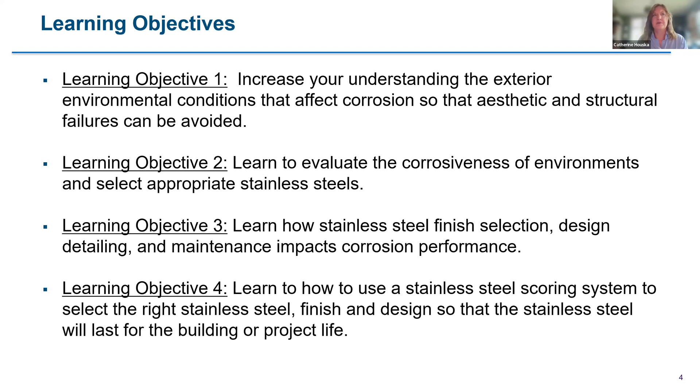I'm going to introduce you to a scoring system that I developed for the International Molybdenum Association, with input from other corrosion specialists around the world. It's geared toward aesthetic applications where any staining is a potential failure, but I will also comment on situations that could cause structural failure.

So I'm going to talk about resources as I go through, and Carly will be sharing links so you can find some of these as well. If you go to the IMOA website, there is a selection system, and in addition to the introduction page I'm showing, there are case studies, specific pages on avoiding galvanic corrosion, coastal salt versus de-icing salt, and other things that should be considered.

For example, if you're doing a green roof or green walls and using stainless steel, you want to make sure that stainless steel is appropriate for a soil environment, because fertilizers, even organic fertilizers, are corrosive.

So I'm going to talk a bit about some of the other resources on subsequent pages, including guidelines for corrosion prevention. But I wanted to let you know that on our website - both IMOA's website, but it was developed by both organizations - there is a library you can download with over 500 publications.

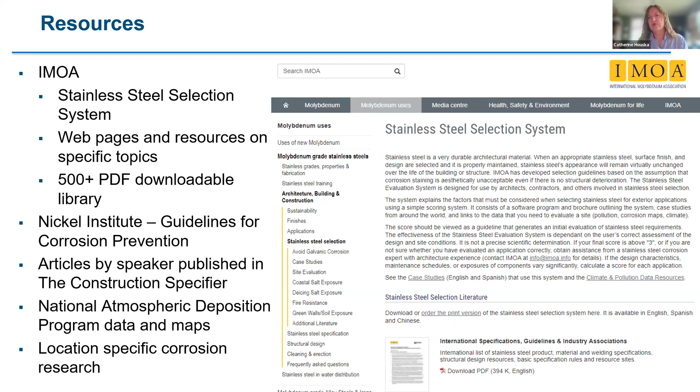And of course, there's site corrosion-specific research, which a metallurgist who focuses on atmospheric corrosion would probably have access to. Today's presentation will primarily be focused on information that is in these two brochures and on IMOA's website.

The scoring system for which stainless steel should be specified is a few pages long, and it provides some brief guidance on things to consider. Guidelines for corrosion prevention is a Nickel Institute brochure that I wrote probably 15 or 20 years ago, updated a few years ago with more information. It's a much more detailed brochure with a lot more examples to help you avoid some of these problems, and it has other fundamental design advice.

So where do we start? All materials will deteriorate if they are exposed to something that causes corrosion or deterioration. Pollution is certainly a factor, and exposure to it varies dramatically depending on the part of the world you're in. That image is one I took in Beijing on a particularly smoggy day.

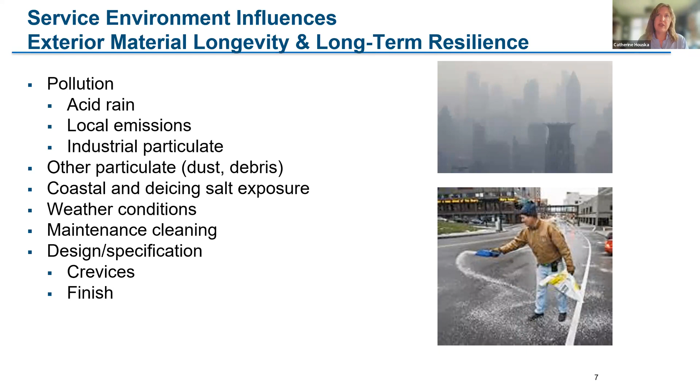Weather conditions play a big role, and their role varies with the specific material. I'm going to focus on stainless steel, but it's important to assess your site and what is expected, both in terms of weather and whether maintenance cleaning will be done, how frequently, and what will actually be cleaned or not. Design makes a big difference. If you've left crevices that are not sealed, or you pick a very rough finish, that will change the equation.

The U.S. government has occasionally done studies looking at the annual cost of metallic corrosion if the wrong metal is selected. The construction number is substantial: $50 billion a year for direct cost, and another $63 billion a year for indirect cost, not including infrastructure or industrial buildings. So for architects, or perhaps facade engineers, anyone working on buildings, that's the annual cost of selecting the wrong metal for a building.

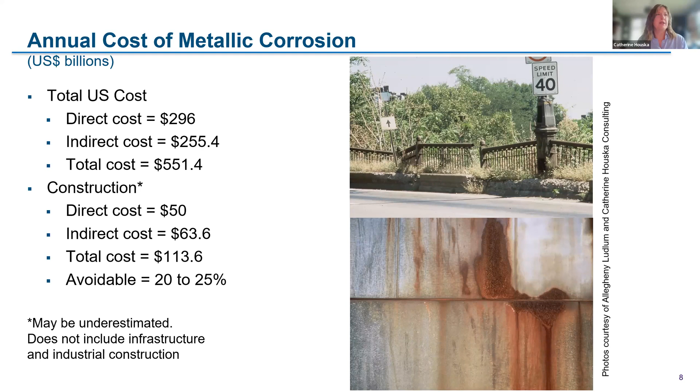These piers in Progreso, Mexico are a wonderful example of the importance of selecting the right material for durability. The functional pier was completed in 1941. It's still in use, the longest pier in the world, and was the first large application for stainless steel rebar. It's been thoroughly studied for those who have an interest, and it's just fine. The non-functional pier was built 30 years after the stainless steel reinforced pier, and it became non-functional within that 30-year period. That was carbon steel black bar.

Now, yes, you could potentially coat it, but there are a lot of states and provinces in North America that have banned coated rebar.

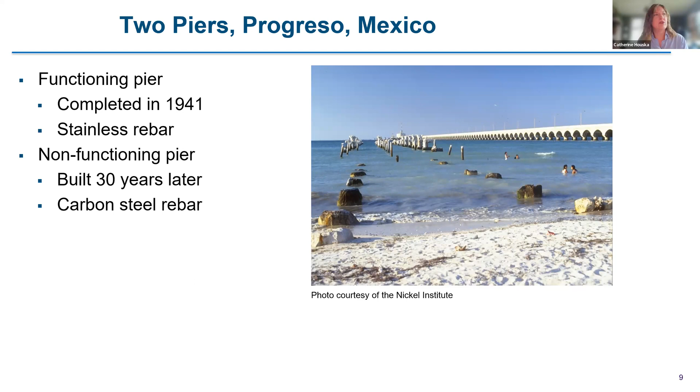So what's the difference between stainless steel and carbon steel? How does it work? Well, stainless steels are iron-based. They contain at least 10.5% chromium and are low carbon. Carbon steels have more carbon and less chromium, and are also iron-based. Note the name is stainless, not stain-free, unless you select an alloy that really will remain stain-free in your environment without maintenance. It's really a matter of what is likely to happen and what is needed.

The family of stainless steels, and then alloy selection within it, are critical. Corrosion resistance in stainless steel is obtained through chromium, molybdenum, and nitrogen additions. Nickel primarily helps with formability and weldability, though there are specific applications where it also helps with corrosion resistance. But the main advantage in the types of applications most of our listeners will be working on is that formability and weldability.

When stainless steel is clean and exposed to oxygen, it will form a thin passive film, similar to the passive film you might be familiar with on aluminum. As long as that stainless steel is corrosion resistant enough for the service environment, it will remain free of corrosion. But it is very important to select the alloy.

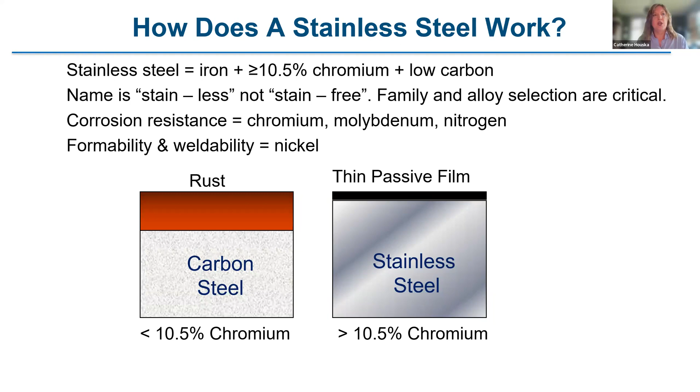In comparison, carbon steel forms rust on the surface, a thick uniform layer. When stainless steel starts to corrode, we get little pits on the surface. I've cleaned the sample to clean away the staining that was on the surface so you could see what that looks like. In comparison, carbon steel has uniform corrosion over the surface and a layered appearance. If it's not removed, that layered area can actually accumulate more of what's corrosive, along with moisture, and accelerate the corrosion process.

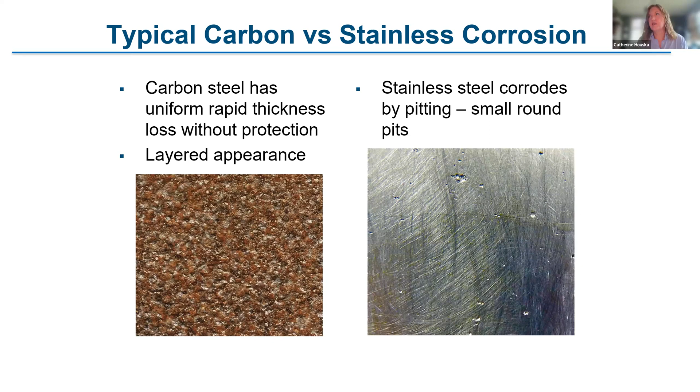So, some basic rules to avoid problems.

The three families of stainless steel that I'm going to mention today, which are most commonly used, are austenitic, duplex, and ferritic. The differences between them are their microstructures, but there are also differences in strength and their ability to absorb energy. Additionally, some of these stainless steels, like the duplexes, are far more resistant to chloride stress corrosion cracking and crevice corrosion. So if you know that's a potential issue and you can't avoid it, you might want to consider a duplex over an austenitic.

The austenitics are more formable and very easily weldable. If there was a problem with a weld, there's a good chance you could re-weld without it being an issue. It's more forgiving. They also have the most finish options. So there are reasons why austenitics have been so popular in architectural applications around the world.

You should never simply say stainless steel in your specifications. That's not enough. That would permit those bidding on the project to use the cheapest stainless steel they can buy, which might not be corrosion resistant enough or have the other characteristics you need for your application.

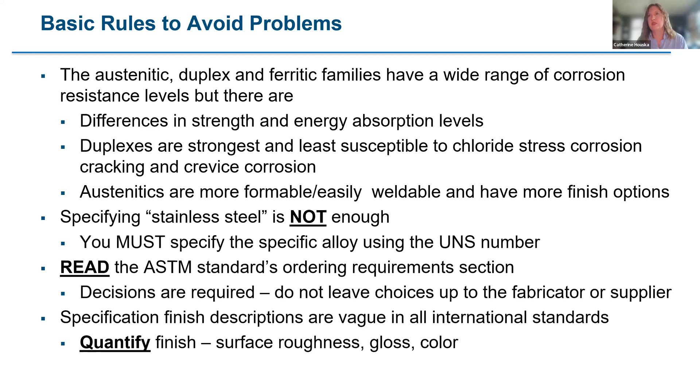Additionally, when you specify the finish, please don't use vague descriptions. Number 4 is a vague description. If you really have to have an aesthetic application and you have to have matching, you need to quantify the finish, the surface roughness, the gloss, color, unless you're having the surface electrochemically colored or applying a PVD color. Otherwise it correlates with the surface roughness when you're talking about a stainless steel that does not have color applied.

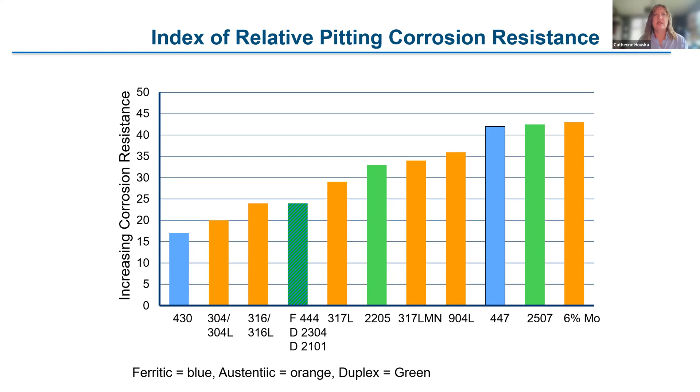You can calculate what we call a pitting resistance equivalent number, PREN, based on the chemistry of the stainless steel. This gives you a relative ranking of the stainless steels. It is useful for understanding relative corrosion resistance, but it's also very important to understand that those numbers may not tell you which alloy would be better for a specific environment. So you have to go a step further, but if you're trying to explain the difference in overall corrosion resistance between, let's say, 316 and 2205, it's a pretty handy tool.

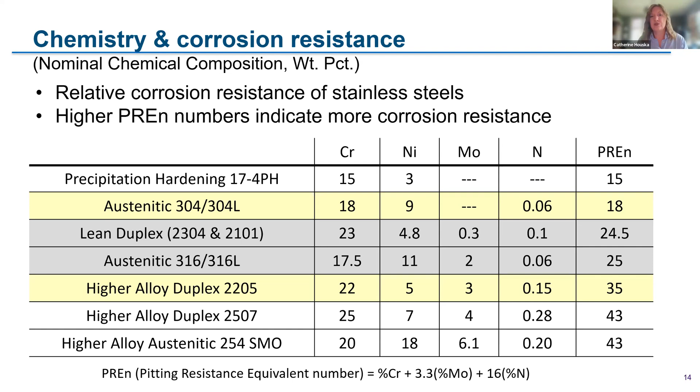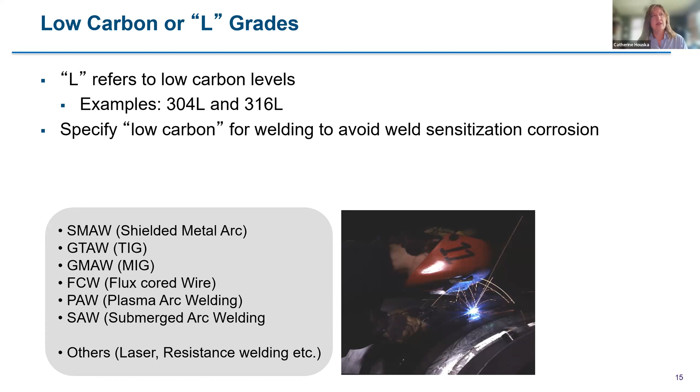So when you see L, like 304L, 316L, in a common name, that means low carbon. That is only needed when you are welding the stainless steel to avoid sensitization of the weld, which will give you a band of corrosion on either side of the weld if it were to happen. There is no price premium for low carbon stainless steel in much of the world, but I have seen it in Asia occasionally, so it is something to consider. If you're not doing any welding, you may not need to specify low carbon. In Europe and the Americas, generally you have dual certification of 304, 304L, 316, 316L.

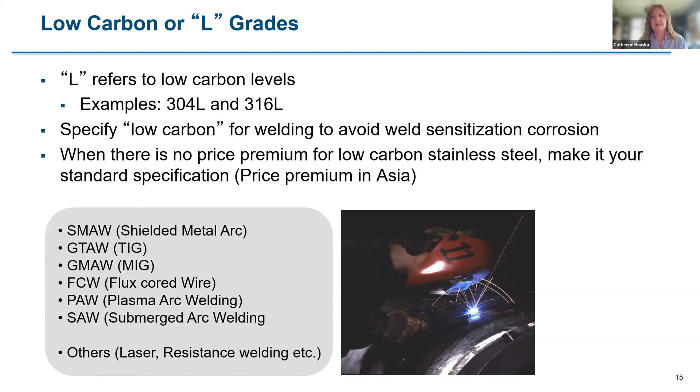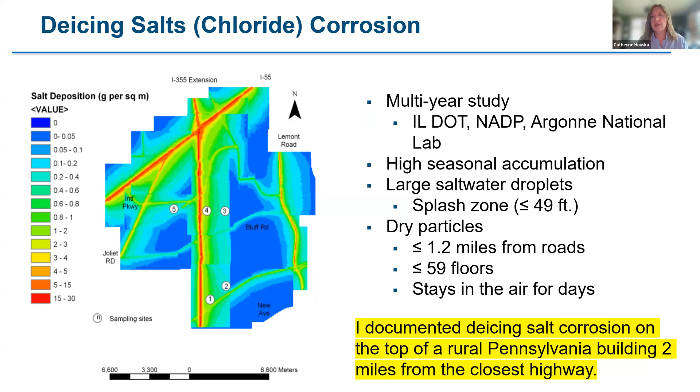You should also be thinking about what might happen with sea or brackish water immersion. Separate from developments being created floating on water, we unfortunately have increasing levels of climate change, which are causing dramatic flooding in some cases.

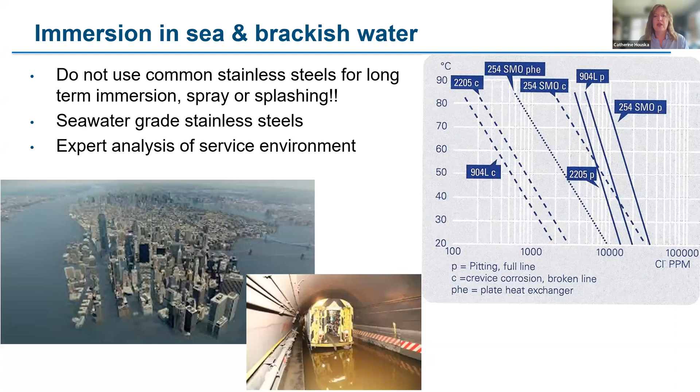2205 and 904L are the lowest alloys we show, and for long-term immersion in sea or brackish water, they are not a permanent solution. It really depends on the chloride level and other factors. So if you are going to have a project with longer-term immersion in sea or brackish water, you really need to be speaking to someone who is an expert on that type of corrosion.

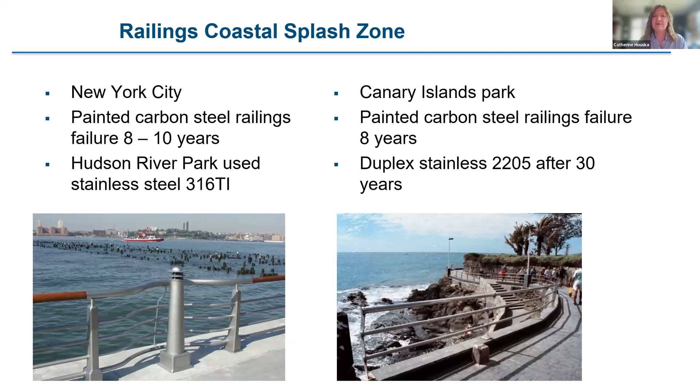Within a few weeks, it had significant staining. They thought that they'd gotten the wrong alloy. The stainless steel producer sent somebody to take a look because this was going to be a large project, and they said, yeah, wrong alloy. That alloy is never going to hold up in this, essentially a salt spray test. They ended up using duplex 2205 with a smooth mill finish, and this is what it looked like 30 years later. No problems. It's all a matter of the right alloy.

There is a lot of research data available to corrosion specialists like myself who collect this. There was one study done by Outokumpu in the Middle East, and they kindly shared the data with me. I converted it into something that probably means more to most who are working on buildings. I assumed a roof, used the thickness right out of the SMACNA architectural sheet metal manual, put in the corrosion rate, and calculated the time to perforation.

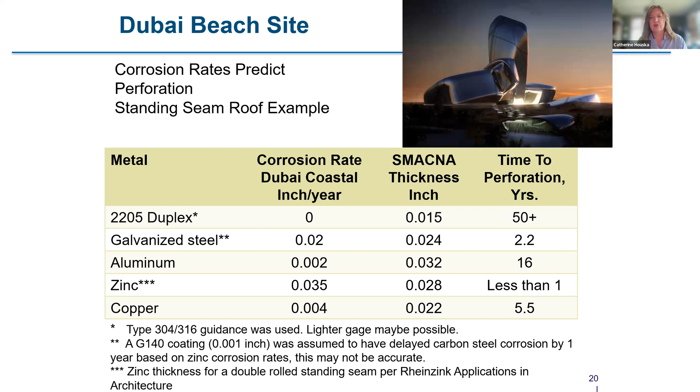This is based on the average corrosion rate, so perforation could well occur before that. 2205, depending on the finish, did have some very light staining as they extended the testing, but it wasn't measurable. So the time to perforation would be over 50 years. In comparison, everything else corroded at a very rapid rate, with aluminum having the next best time to perforation at 16 years.

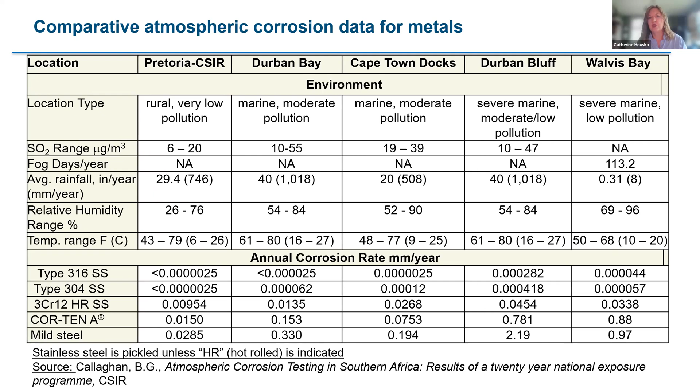So there is data from South Africa, and you can see this here. I'm comparing more materials. If you look at Durban Bluff and Walvis Bay, which are the most aggressive marine environments, you can see 316 and 304 versus weathering steel and mild steel, and there's a huge difference in corrosion rate in a more aggressive location. So there is data to assist with these decisions.

I live in Pittsburgh, Pennsylvania. This is the equivalent of the second floor of 3 different buildings. One was 430, another 304, and the final one was 316. It had been about 3 years since any of these had been cleaned. Being local, I'm often asked for cleaning advice, and that difference in level of corrosion is directly related to the alloy selection.

They all had a very fine wet polished number 4 finish, so it wasn't a finish difference. With a 304, that's superficial - with a wet cloth, it wipes off. It's much like the Inland Steel building in Chicago. First thing in the spring, there's staining on it because it's type 304.

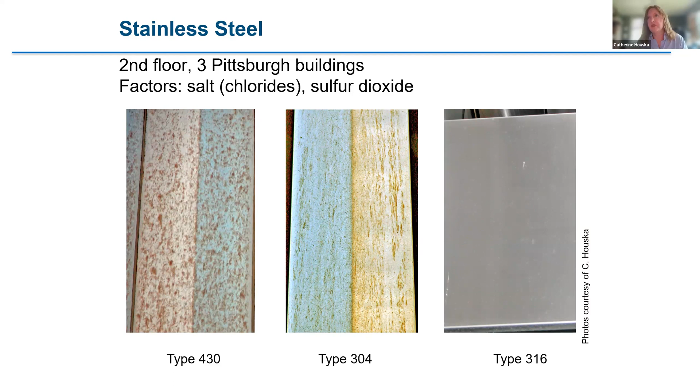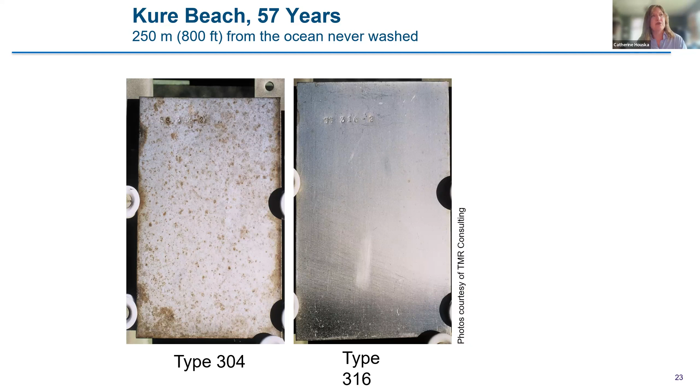There are other examples in older buildings. That 430 has pitting that is visible and will eventually probably perforate. More samples from Kure Beach on the Carolina coast after 57 years of exposure. That is considered a moderate coastal environment - low pollution, not particularly high salt exposure. You can see the difference in appearance over time. From the same location, what used to be a galvalume coating on carbon steel after 48 years.

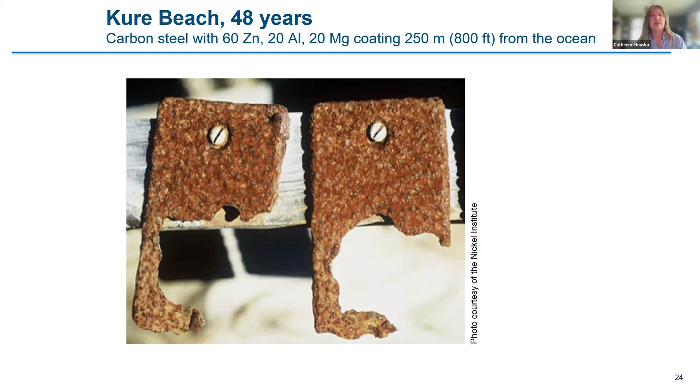So please look at the data that's out there. Some of that is in Guidelines for Corrosion Prevention, which is one of the brochures that I mentioned to you. There's been quite a lot of research on the relationship between surface roughness and corrosion performance, mainly for industrial applications.

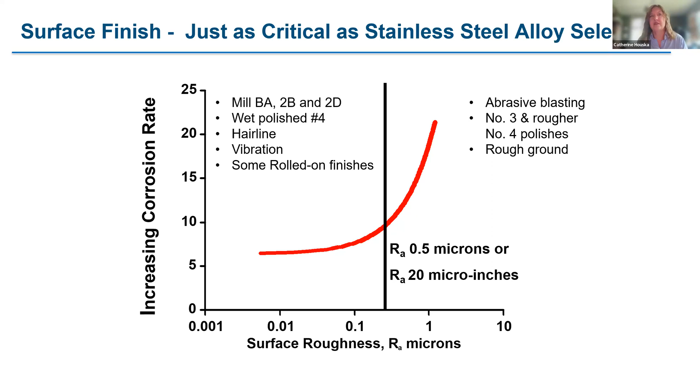I've done some myself for some of the polishing houses. But the general rule of thumb is that if you have a surface roughness of RA 0.5 microns or 20 microinches or less, then you will have a much lower corrosion rate. So those smoother finishes will need less cleaning, they'll accumulate less dirt, salt, whatever is in the environment, and they will perform better. If you really think you need a rougher finish, if you aesthetically have to have abrasive blasting, then the corrosion rate will be a lot higher, and you might need to use a more corrosion-resistant stainless steel to achieve an acceptable aesthetic finish.

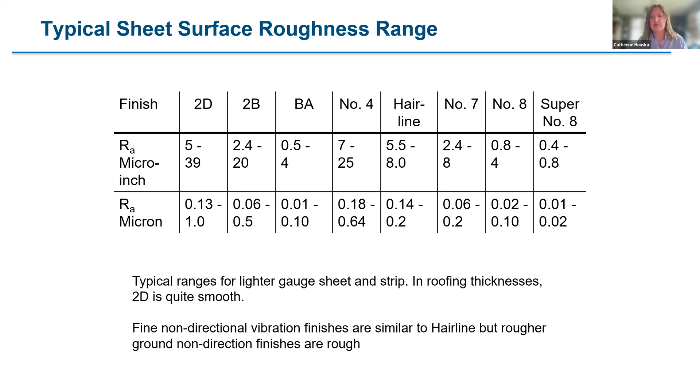In another Nickel Institute brochure, Timeless Stainless, I did a survey of finish suppliers in North America and Europe and included that in this table. You can see that a number 4 finish, which is very popular, can be very fine, or it can be rougher, so it could be on either side of the line that I just showed you. If you have an aesthetic application, or one where you really can't tolerate corrosion, it is important to not just say 'I want a number 4 finish,' but to also define the surface roughness, the maximum or range that you find acceptable. I usually suggest a range if you need to have aesthetic matching.

Sealing the crevices or avoiding them is ideal. If you're going to use a woven metal screen, like woven stainless steel sunscreen or similar, then you need to make sure that the alloy that you've specified has enough resistance to crevice corrosion so that you don't end up with crevice corrosion where every single line crosses.

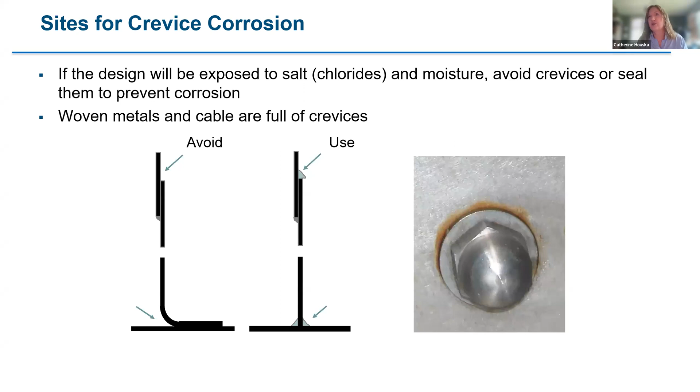Galvanic corrosion is another very common problem. I've given presentations to architecture firms, multiple firms, where I've been asked to stop when I get to this point because they have had significant problems with galvanic corrosion, mainly when they've used aluminum to hold stainless steel or copper panels in place. So they've got aluminum structural sections that have corroded away.

So let's talk about the basics. First of all, there needs to be a difference in the corrosion. You have to have dissimilar metals and a difference in corrosion potential. There has to be direct metal-to-metal contact, and there has to be moisture on a regular basis. So it's not likely to be a problem inside a climate-controlled building, unless you have a bigger problem like a leaky roof.

Ideally, you want to avoid those combinations, but that's not always practical. But what you can do is use a non-conducting barrier. There are a variety of different materials, polymers that are used between metals to seal them. The appropriate choice will really depend on likely movement, temperature, and a whole variety of other factors.

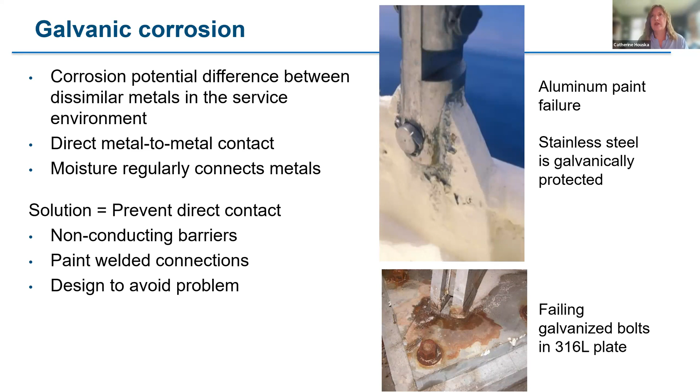The bottom picture was taken at a very wealthy person's private residence. These stainless steel structural sections held the house several floors off the ground because of storm surge concerns, but the bolts were galvanized steel, and they are corroding at a highly accelerated rate.

Type 304 is great for rural and suburban areas with low pollution levels and where there's not much salt exposure. The Gateway Arch has type 304, it's structural on the exterior. It is in a park setting. There is some corrosion on it, but not much. It doesn't get direct salt exposure from de-icing salt other than right at the base, and they've been changing what they're doing there. Most of the discoloration on it is actually from industrial pollutants when St. Louis was a much more industrial city. But if you have a smooth finish and you have regular cleaning, sometimes you can get away with 304.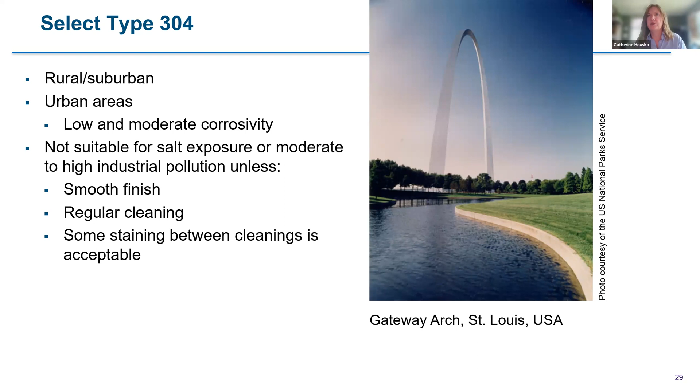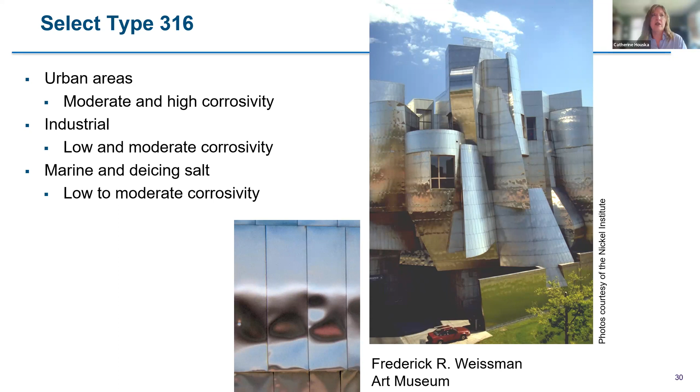But both of those have to occur. 316 is the better choice if you have a bit more pollution and you have low to moderate levels of salt exposure. This is a museum with a 316 exterior, and I took that picture from a highway bridge. The panel close-up was the panel closest to the roadway, and right by the crevices, because this was 316, you can see a little bit of discoloration, not much. It would have been easily cleaned off, but otherwise it's held up well, other than some dirt streaking.

This is an example of the type of application where you really need to use a more corrosion-resistant stainless steel. These are type 316 railings around the Hong Kong Convention Center. They have a really rough finish. The bolt heads have a smoother finish, and that's why they're not corroding. But spray and splashing of salt water is going to happen every day.

Ultimately, there was a decision made to clean these very frequently, I think on a weekly basis, to get the salt off, after they'd removed the staining. But that's not practical for many parts of the world.

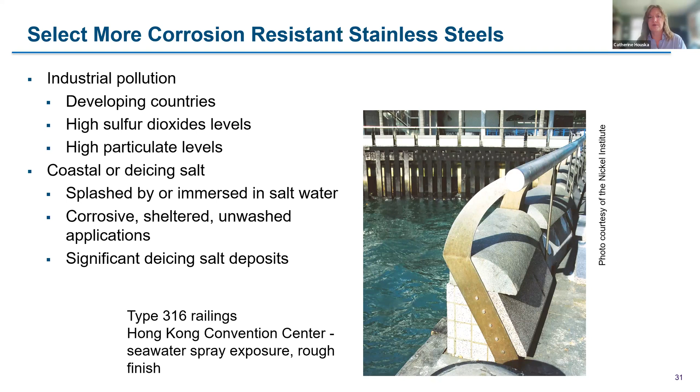In comparison, the Franklin Delano Roosevelt Memorial in New York City was designed for a 100-year storm event. I was on the team that worked on this, and I was told it had to survive a 100-year storm surge, which would mean that the railings and the bits of stainless steel holding together those blocks of stone could be immersed for days in salt water, and they didn't want to have to refinish. So we went with 2205. They also wanted a quite dull, rough finish too, so that was another factor in the 2205 selection.

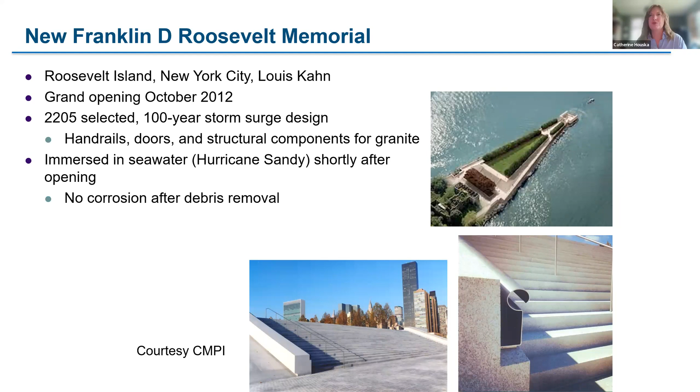The grand opening was weeks before Superstorm Sandy came through. Yes, everything was immersed for days. There were trees all over the place. There was zero corrosion of the 2205. So it met that requirement.

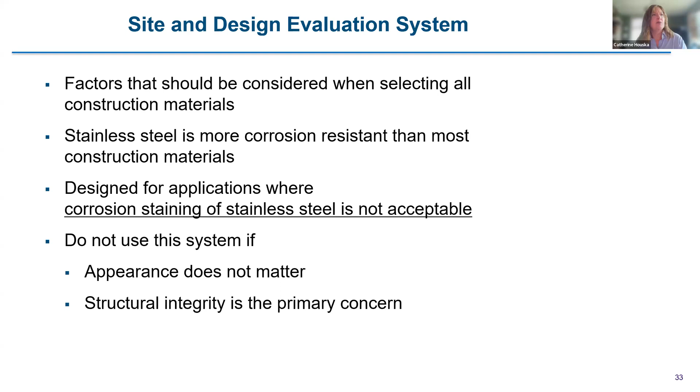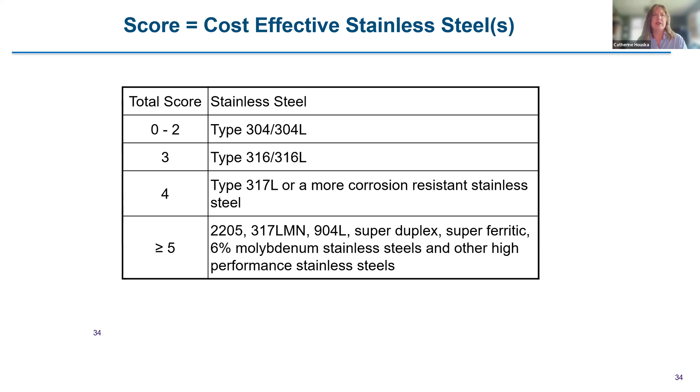So IMOA has developed a site and design evaluation system. This was work I did for them perhaps 20 years ago. We've continued to update it. It is really intended for aesthetic applications. The score that you get determines which alloy is most appropriate, and it guides you to really corrosion-resistant levels.

If there is pollution, then you give it a score. In a rural area, you're generally at 0. In the United States or Europe, you're not likely to be above a low or moderate level of pollution in an urban setting. In developing parts of the world with very high pollution levels, you could be at a 3 or a 4.

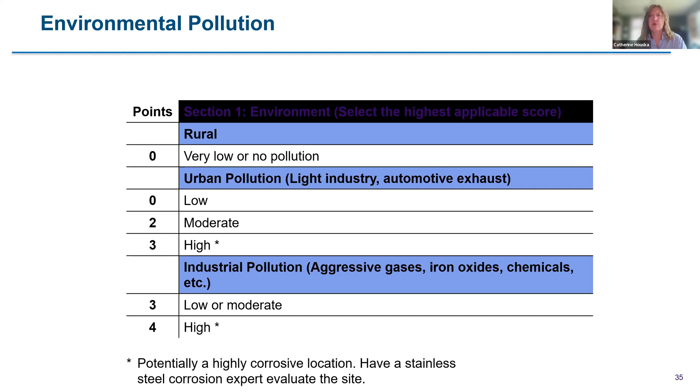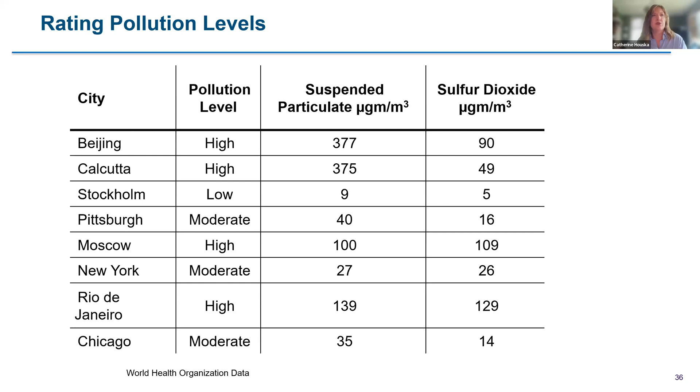In comparison, in the United States, we really don't have an acid rain problem any longer. This is starting to change in the Pacific Northwest with pollution that's coming from Asia.

So with coastal or deicing salts, the distance from the water will determine how high that salt concentration is likely to be on surfaces. Part of also suggesting that you look at the National Atmospheric Deposition data is that I've provided general guidelines here. There are locations that are different, where higher levels of salt travel further inland. Generally, it's the first areas with salt spray in the first 100 feet that have the highest levels, and then once you get past that, the salt levels start to drop considerably.

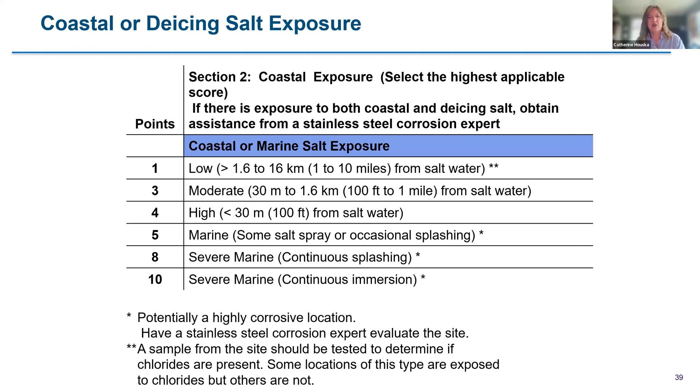De-icing salt is a bit harder to gauge in terms of how far it might travel. It really depends on the conditions - if you've created a canyon that happens to be lined up with a primary wind direction, how much salt is used.

Generally, the highest salt exposure is on the first 3 floors. Sometimes it's just a few feet - it really depends on the specific setting. So evaluating the site is important. If you talk to the cleaning contractors for a given city, they generally will know how high salt goes on buildings in an area.

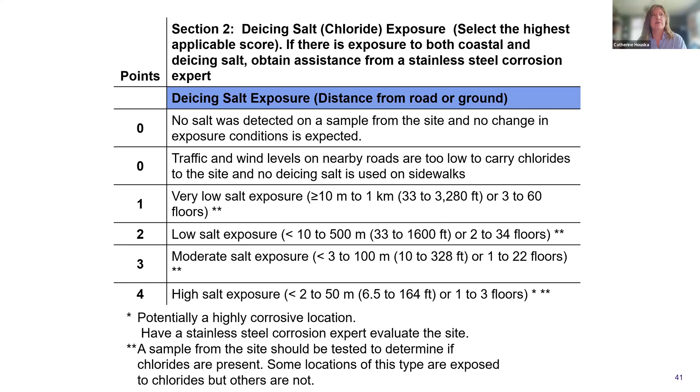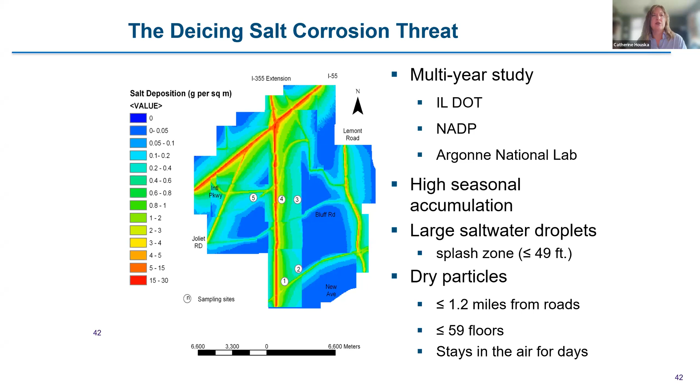And I should note that 70% of the United States has some de-icing. Again, this is showing you this map with data from the area around Chicago. So there is some data out there, not as much as we'd like.

I'm mentioning salts because the type of salt matters. We've switched to using a lot more calcium and magnesium chloride for deicing. Those are in sea salt, but in a much lower concentration than sodium chloride.

So if you have an application where deicing salt is being used on the adjoining roadway and they're mainly using calcium or magnesium chloride, and you can look at public records to determine this, as soon as you are above freezing and you have at least 45 to 50% humidity, those salts are active and actively corrosive. When we used to use just sodium chloride, rock salt, you had more time before you had a corrosion issue - you had to get up to 50 degrees and 76% humidity. So a lot of spring rain washed it away before you had active corrosion on buildings.

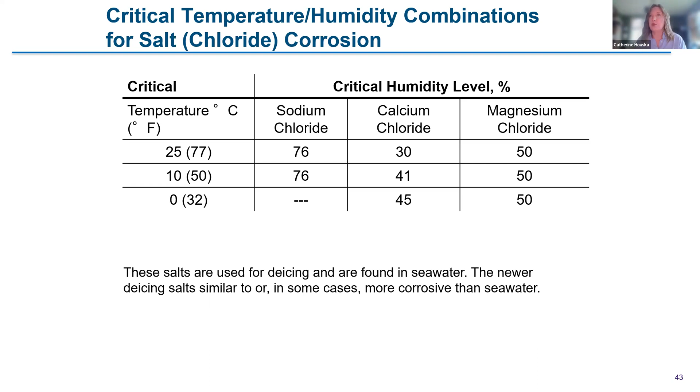So we have changed our environment. There's a reason why more corrosion is happening. In addition to common de-icing salts, there are other products being sold for de-icing.

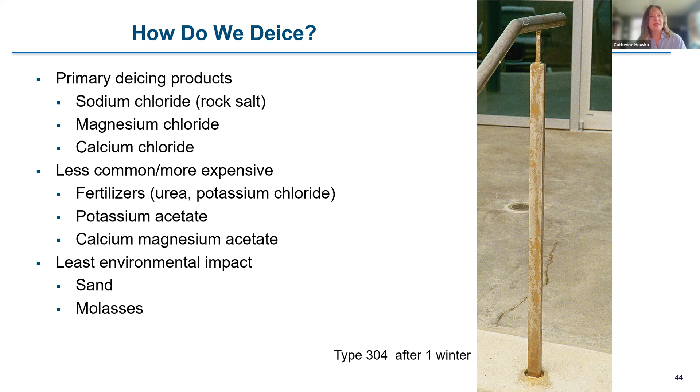Weather patterns make a big difference. If you have a temperate climate with a lot of regular rain, then you get to subtract points. If you have a hot climate where there's low daytime humidity, and if you look at the average, it might be less than 50%, and very little rain, then we have to increase the score by two.

I should note, I'm mainly concerned here with a desert region on the coast, not an inland region. So if you were to look at their daytime versus nighttime humidity, the average humidity would be very low, but if you look at the nighttime humidity, you might be up at 80%. So the time of wetness, when corrosion occurs, is at night. If you're not looking at those numbers separately, you can think you have a situation that's not very corrosive when it actually is.

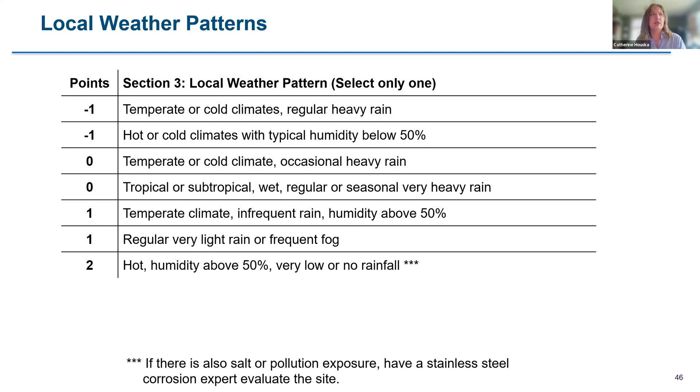Design considerations: surface roughness can add a lot of points. I showed you the effect of surface roughness on corrosion. If you've got unsealed crevices, you have to add a point. If you've created horizontal surfaces that are shelves that can accumulate more salt or debris, you have to add a point.

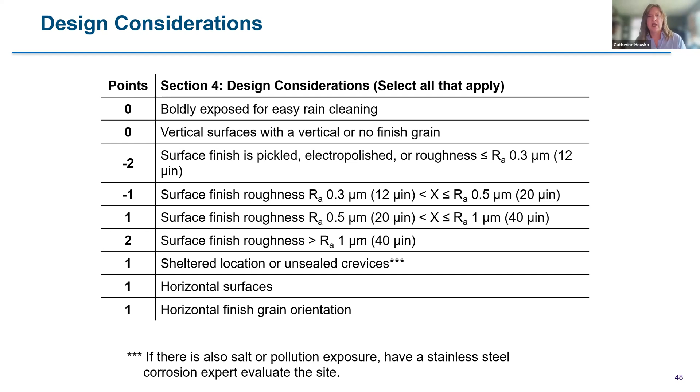There are a number of factors that can make a situation more corrosive. This is an example from Australia. The specification called out a rough finish. The supplier tried to talk them into a smoother finish, asked if they could polish an area, and this corrosion difference is strictly related to the surface roughness. If the whole railing had a finer polish, it would not have had a corrosion issue.

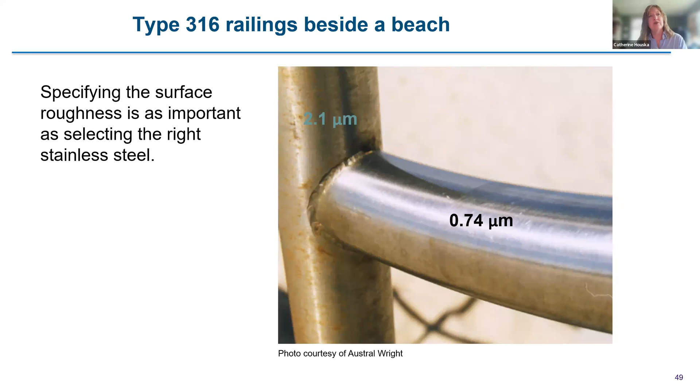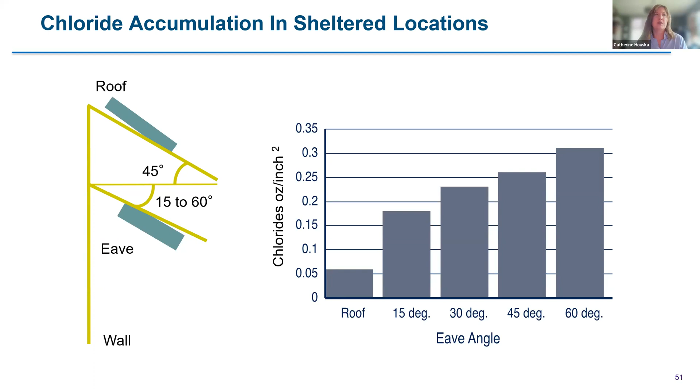I just wanted to remind you again that we have provided you with data. Sheltered locations collect a lot more salt, so areas under a building eave or any sheltered area on your building will have a lot more salt accumulation. There have been numerous studies on this around the world. The most extensive was in Japan at various distances from the water, but it's an island nation, everywhere has salt. So the roof had enough rain to have very little salt accumulation, while increasingly sheltered areas under the eave had substantial accumulation.

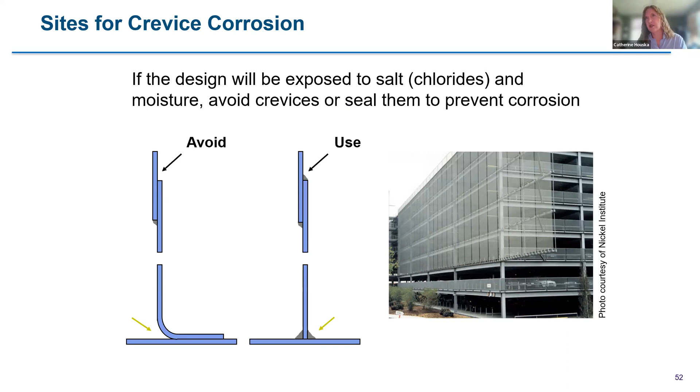This was just a reminder about crevice corrosion. Again, look at things like woven stainless steel and be careful about your selection. This is an example of a light fixture where they didn't seal the crevices, and that's where the corrosion was.

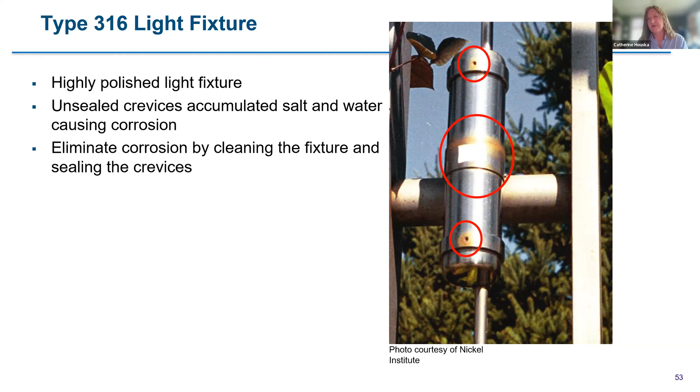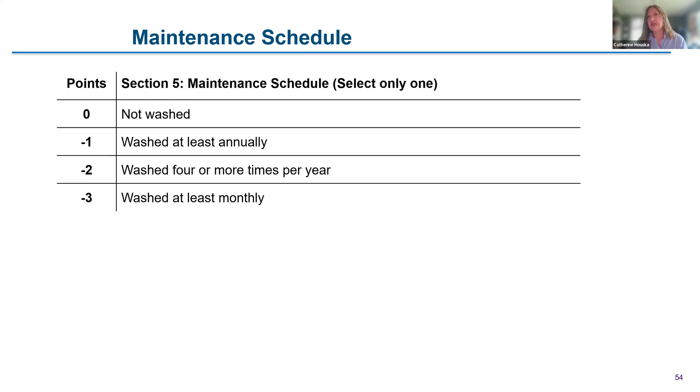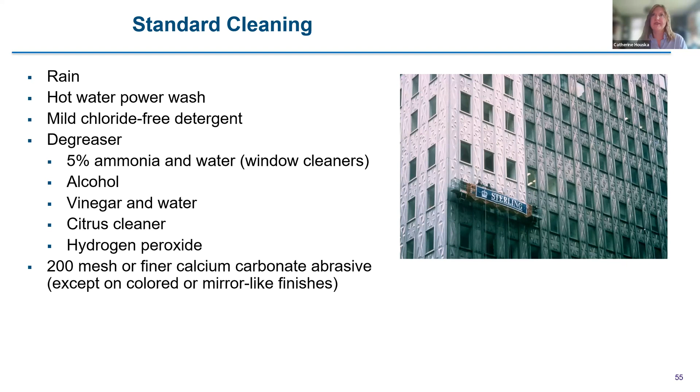Maintenance is important. If your owner is willing to do that, the more maintenance that is done, the more points you can subtract. With stainless steel, please, if you can, take advantage of natural rain cleaning. If it's appropriate for the application, power washing works well. Often you can simply clean the stainless steel with whatever you're using on the windows for window cleaning. If you have something adherent, there are a number of things that can be used, but products like Bon Ami or Barkeeper's Friend can be used sometimes on finishes that aren't mirror-like to take off deposits.

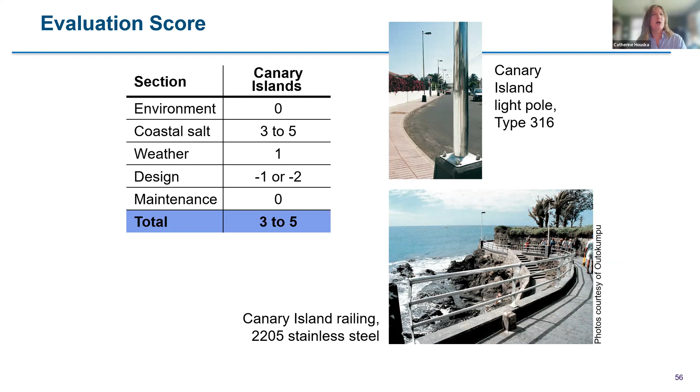Here's an example of one of our case studies, Canary Islands light pole versus railings. And oh, I didn't want to forget the possibility of iron contamination, which has nothing to do with anything else I've shown, but unfortunately happens too frequently. I can't believe they didn't grab my camera and break it when I caught them in the act. But those sparks got into the stainless steel and caused that lovely corrosion.

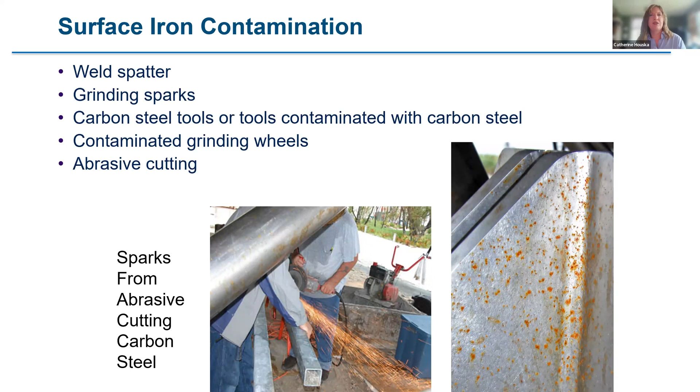If you get embedded iron on a surface, there are a couple ASTM standards for removal of that iron. If it's superficial, then A967 would be sufficient. If it's deeply embedded, as it is in this image, then you need to probably grind and pickle.

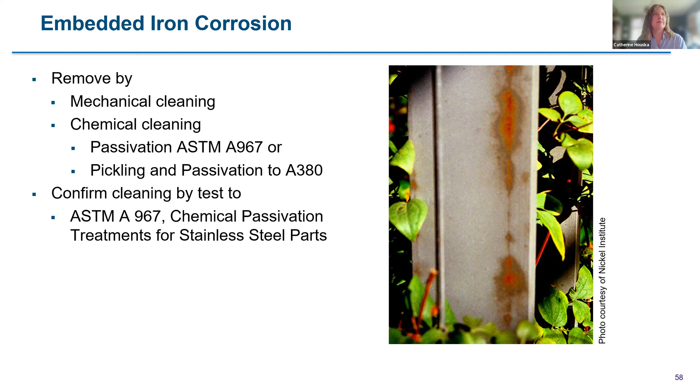So we have literature for you. There are a number of resources that we have provided, and if you assess the site carefully and pick the right stainless steel, you can have corrosion-free performance.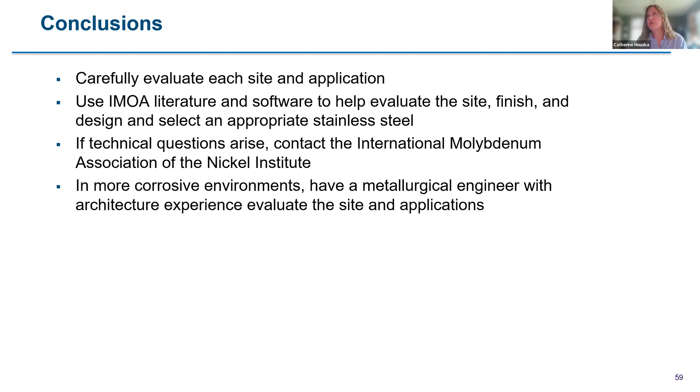The library that I mentioned is several layers down on the IMOA website. You go there, you have to go to the media center, then to downloads, and then the Building and Construction Stainless Steel Library. There are over 550 PDFs covering these topics. The architecture section, which has information on many different topics, is again a couple layers down within the IMOA website. You have to go to Moly Uses, molybdenum grade stainless steels, and then architecture, building, and construction.

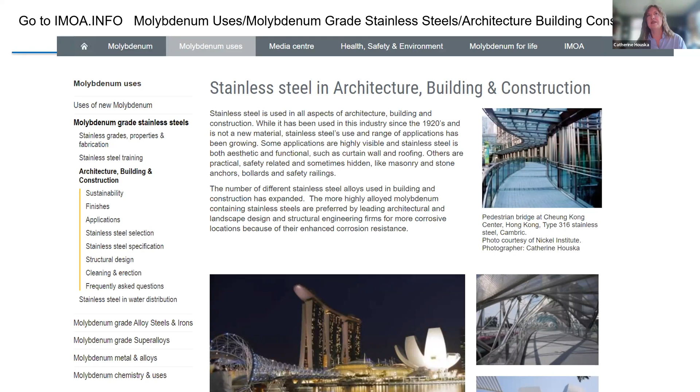Technical help is readily available, and if you need up to an hour of technical experts' time, please go to the Nickel Institute and go to their inquiries section to request help. With that, I'm happy to answer questions.